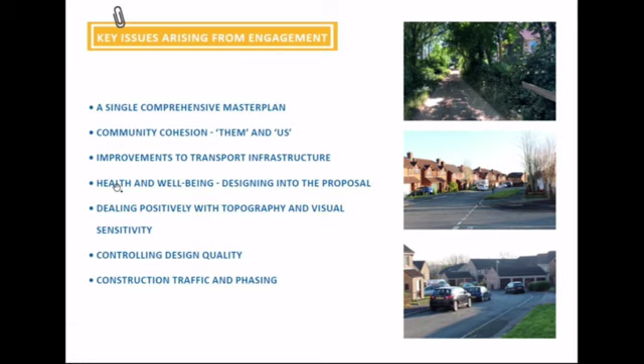And finally, improvements to transport infrastructure, construction, traffic and phasing. That's certainly critical for local residents, and often the classic answer is there will be a construction management plan. I think we need to be seeing that now so that everyone can be reassured that it's in hand.

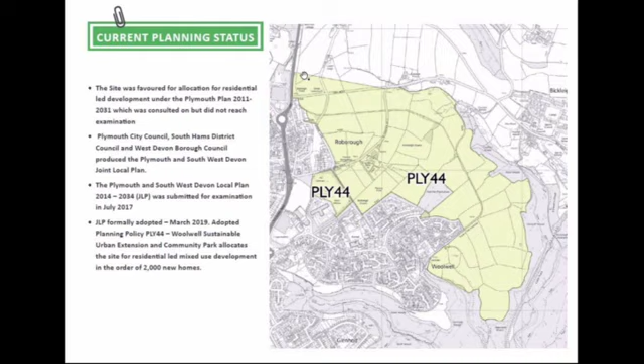So our starting point was always, although it was a draft at the time, policy PLY 44. I'm not going to try and read down this because that would be foolish. What we've done is just try to summarise the key issues that come out of that, and that's not to underestimate it in any way, shape or form.

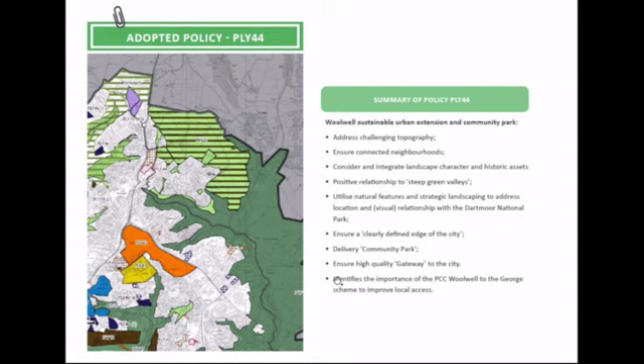Very early on, somebody from the Dartmoor National Park team said we need to consider not just the approach from the park into the development, how you first arrive at Plymouth and Woolwell, but the reverse - how, moving northwards, do you present the park? So anything that happens in the top part of the site, adjacent to Tavistock Road, needs to create a positive gateway, both to the city, to Woolwell, and to the park to the north. This identifies the importance of the Woolwell to George scheme and how that will make this function.

Back in 2015-16, normally on a master planning project of this scale, I'd be keen to get my pens out and start sketching ideas, and then all the other consultants join me around the table and we work through these things, making sure components like ecology, archaeology, transport, drainage and landscape are balanced. This was different. This was very different.

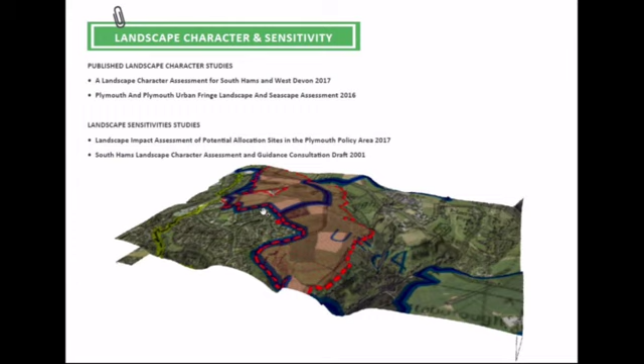Our landscape architect consultant, Ben Rosedale from EDP, did a block of work really getting to know the landscape character, the topography, everything about the site. He presented that to us formally, in fact to some members and officers back in late 2015, as our first understanding, to try and make sure we got it right. He looked at existing landscape character studies and sensitivity studies to really understand the lie of the land.

Respond to the open views to and from Dartmoor, and the requirement for woodland structure planting. I don't think it's a case of just designing enormous new woodland buffers to hide everything - we need to be smarter and more intellectual than that. One of the things we want to do is preserve as much of the existing vegetation, trees, hedgerows and woodland blocks on site as we physically can, and I think we can achieve that - an enhancement of the existing.

Respect the physical constraints of steep-sided valleys, partly to do with movement and accessibility. And understand the bigger picture about what we see from the church at Bickleigh, the barracks, how lighting in the barracks might affect the site, and how any new proposals might affect those long views from places like Shaugh Prior.

Then importantly, the tramway. It was always discussed that the tramway, particularly in this north-eastern section where the views are most visible and open from the national park, provides an existing physical barrier to work to. At the moment you can walk along this section quite comfortably; this section you struggle to find it - it's buried in bits of hedgerow and becomes single-sided. But this section you can still see the Devonshire banks and the vegetation on either side, and it's a major asset for the project. We're treating that as one of our main foot, pedestrian and cycle routes through the development.

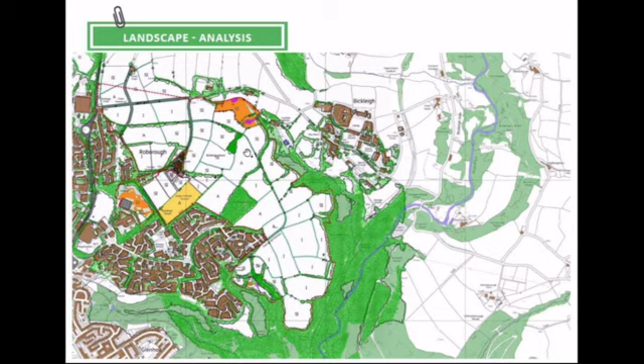There is then a sort of apron which goes around the site to Pickpie Plantation. Although the top section of the site around New Road is relatively flat, sections around the central parts of the tramway and down into the southernmost sections of the site, you really do suddenly find the steepness of those slopes.

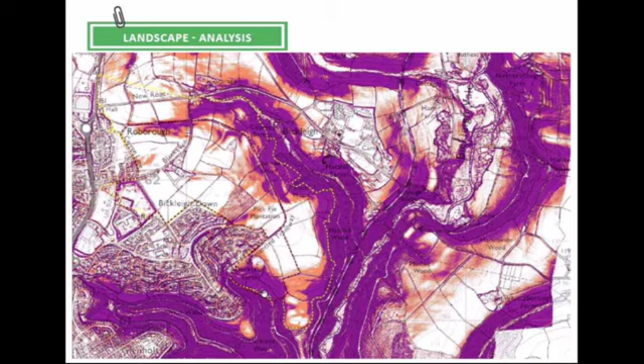And part of that landscape character work was... sorry, I ought to orientate this again. So, Tavistock Road, I think we've just got the A38 on the very bottom left-hand corner of the slide there. The red is the policy area, so you can see it's at a different scale. Apologies for jumping up and down the scales.

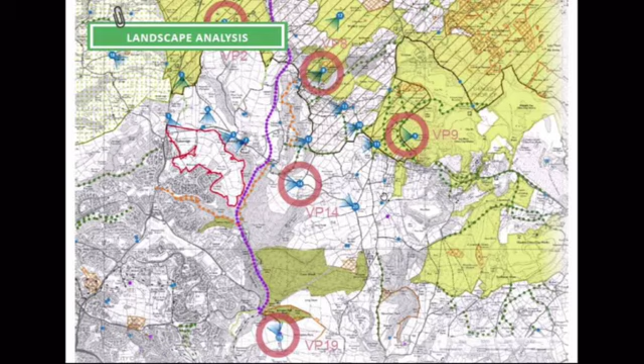And these are viewpoints that were taken. They're one of many, I just happened to select this grouping out of a very long presentation. But you're into the Dartmoor National Park, and the next two slides will show you the view from slides 8 and 9. We wanted to really understand from these long views, Hawks Tor, and I think the next one is Dewerstone, if I'm correct, what we were actually looking at across the landscape.

I'm going to try and guide you in. This is the tramway coming around the site, as we've seen. We're back to the previous scale here. If you look at these, there are 1, 2, 3, 4, 5 diamond graphics shown on this drawing. From the national park, from beyond Bickleigh as it were, this is the most sensitive part of the site, and this is where we need to reinforce the existing hedgerow structure.

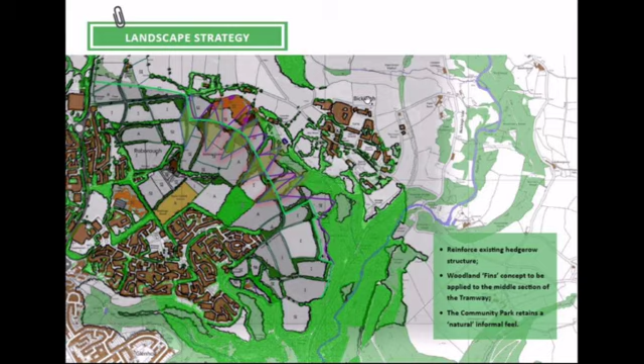And very early on, officers from the national park were saying, if you do that, please don't turn it into a very formal park. It needs to be naturalistic. It needs to be almost agricultural in its quality. Maybe even animals are used as part of the maintenance and management regime of that park in the future. An interesting concept, but I could see the logic straight away.

This really is just the next sequence in the diagrams, where these pieces of woodland and new structure are starting to be positioned, linking together with Pickpie Plantation, forming screens in some places, forming little viewpoints in others, but it's all based around the tramway.

Now, woodland planting in three forms is in the green box on the bottom right-hand side. I better explain myself. Some of those blocks of woodland will be solid, some of them buffer - that's number one. Number two, filter - strategic groupings or blocks. An accent - maybe individual trees, very carefully positioned. So yes, we are playing nature. Yes, the landscape architects are going to have a very interesting job to do here.

But there is a way that any development that takes place in this part of the site can be assimilated, mitigated to some extent, through the skill of the landscape architects on this project.

Tramway as a strategic foot cycleway link - that's a no-brainer from the beginning. And then importantly, all of this site needs to be drained, and the water needs to be held on site before released to the wider picture.

And very simply - and I perhaps apologize to anybody who is a drainage engineer in the room at this point - the northern extents of the site will drain to attenuation basins situated and constructed adjacent to New Road. They will then feed into the watercourse and effectively work their way down the river valley into the system.

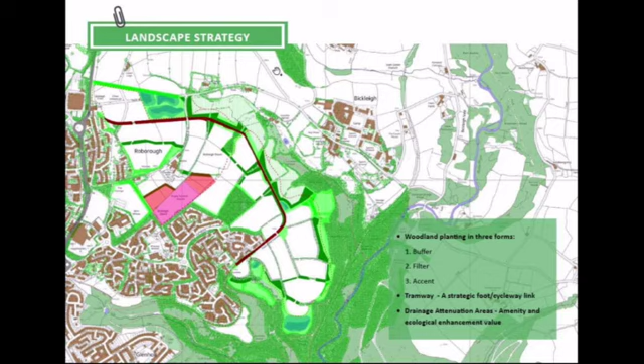Site constraints. I've talked a lot about landscape, I've talked a bit about some of the other items, but this drawing captures all of the things that need to be taken into account when looking at the site.

So we've got the contours on, so we can see the way the levels and falls work. We've got public rights of way, we've got our strategic requirements. So the offset - this purple line here that I'm just tracing with the mouse - this offset 40 metres to the existing woodland, that becomes a constraint to us.

One apology perhaps to you, that the hedgerows - a lot of them are shown in blue. That's simply because they're categorized A, B, C, D, with A being the highest quality, D being the lowest. And our constraints plan tells us that information. So if we do have to put a break in a hedgerow, we know where to go to try and put that break in, the lowest quality.

And finally, just on here, without trying to explain the whole diagram, there are historic buildings, listed buildings - the church in Bickleigh is the obvious one. But in the northern part of the site, we've got some quite considerable utilities constraints, so gas mains, water pipelines, and I mentioned the overhead. And they have their own requirements, their own standoff requirements.

So, first part of our process: knowing the site, getting our landscape strategy together, and really understanding the site, including the stuff that's below ground, including archaeological work.

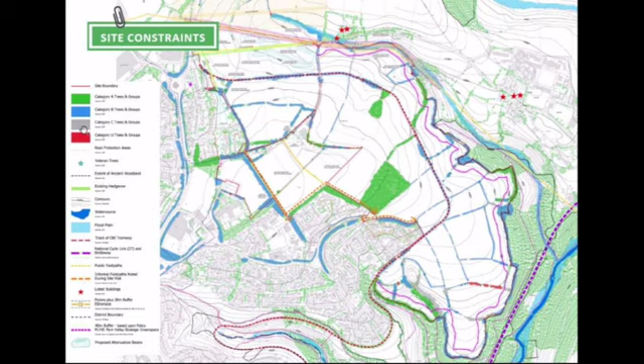Again, different scale of plan. Here we're almost back to the previous plan, where this is the policy area. Here's Woolwell, and then we've got the Tavistock Road coming right the way down through the slide. What this scheme is showing us is where the community assets are - so where retail is, where education is, where healthcare is, where employment is, the blue parts.

And whilst we won't be influencing any of that, understanding all of this is very important, because this is a mixed-use scheme. What I don't want to be doing, or what the team doesn't want to be doing, which I don't think you would want us to do, is to put something very new and shiny within the scheme, which is at the detriment of existing facilities. And we need to be very careful about how we handle that.

It'll, of course, come out in the Section 106 negotiations, I understand that. But even at the early stages, we can do our best to understand how all this fits together.

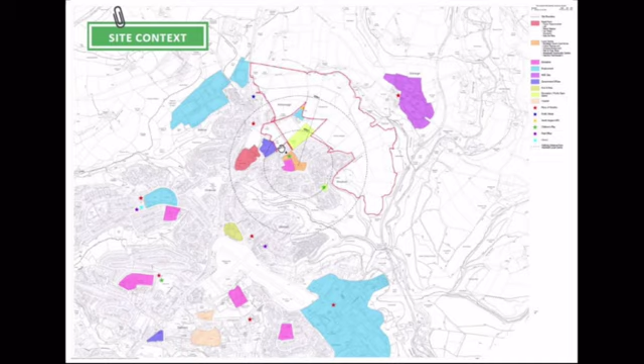Slight change in tack here. One of the things we also have to do in preparation terms is understand the local built character. And this really is, slang again, a game of two halves really. You have the existing Woolwell, Southway - you have other pieces which I won't try and define, but you have the housing that was built between the wars to the present day. But in Roborough, the historic core of Roborough, in Bickleigh, in Shaugh Prior, you have much older, much more historic pieces of settlement, buildings.

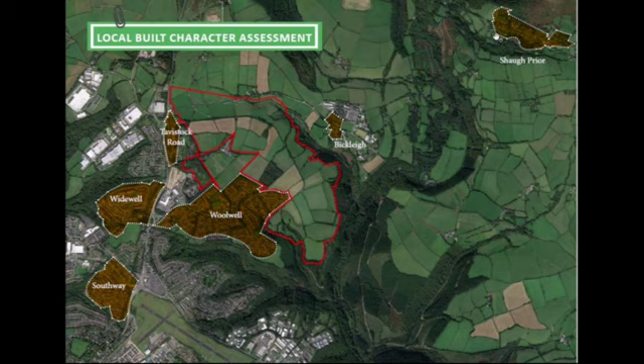And for us, it's understanding what we're connecting to, and really understanding that well. But it's also understanding about what the original DNA of the place is about - and without boring you to death, analysis of the layouts, analysis of the building forms, storey heights, roof pitches.

Do they have chimneys? Don't they? Are gables, dormer windows used? What do they do on the gable ends?

All of that's really important to understand, so that when we create new instructions—and this comes to the point I mentioned earlier about how you control design quality—what is that basic DNA? What is the starting point for us? Once you move to the bottom right hand of this drawing, things change slightly.

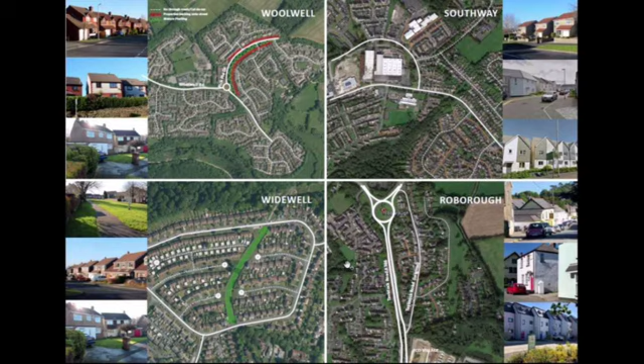You start to understand how stone is used. You start to understand that just seeing a white building, it might be white painted stone, it might be white painted brick, it might be in a more traditional way, a more contemporary way, render. Understanding proportions, understanding the characteristics of this is really, really important.

We would need to present this in the outline application. We've obviously shared it with officers and members. But we need to explain how any new proposal relates to this original DNA. That's part of the challenge that we've given ourselves.

So that's all about preparation, getting ourselves in the right place to actually start thinking about how do you deliver. What is the plan? I'm going to run through a series of six, in some ways very simple diagrams, but in some ways they really do tell the complete story.

It has to start with an understanding of the site on the left-hand side, number one, the site. You have to understand the topography, you have to understand the views, and you have to understand what the tramway can do for us in terms of future plan.

If I move to the drawing on the right-hand side, one thing which is, I think, crucial to success is the relationship between the existing Woolwell Centre, school, community, and whatever we produce within this new plan, this new layout.

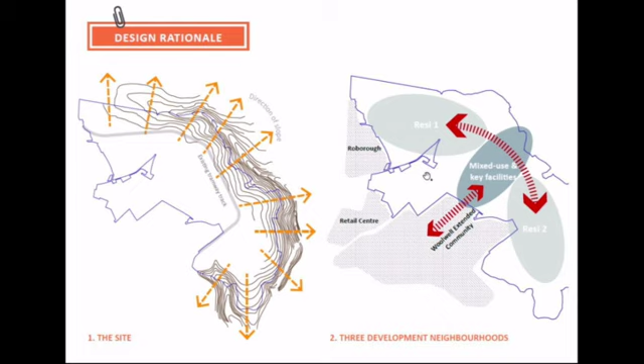We've talked a little bit about the landscape edge and the community park, and that will form a fundamental piece of definition for this scheme. Once it's defined, you don't step over it. That is the edge of the city. Remember, it was one of the objectives in the policy requirements.

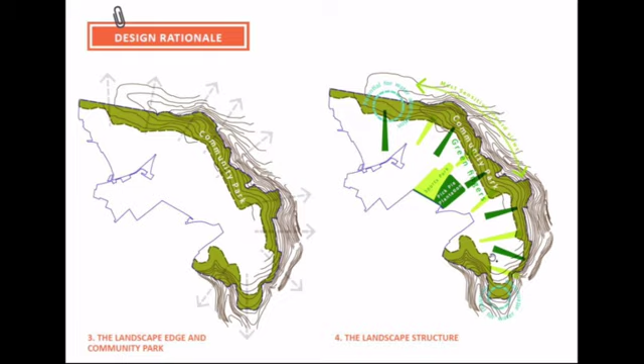If you then start applying to that diagram on the left-hand side the strategy I talked about with the woodland fins, working the tramway, and picking up Pick Pie Plantation and reinforcing the existing sports pitches which occupy the space just next to, or across from, the Woolwell Centre—then you start to see the green strategy, drainage at the lowest parts of the site. This then starts to become our landscape structure.

You've probably been waiting a long time for me to say something about movement and vehicular movement. A scheme of this scale and order needs some kind of definition, some kind of structure. It needs a street—I hesitate to use the word road, I use the word street—to make sure that everyone can orientate themselves. A lot of schemes recently, over the last 15, 20 years, have been based around the principles of very intricate layouts, lots of turns, corners and twists.

You get lost in those places because there isn't a hierarchy of streets and blocks and buildings. What we're proposing here is effectively a new access position on the Tavistock Road, at the north, as you'd perhaps expect. There's a spine road that goes through the site, services it, and joins up with Pick Pie Drive in the south.

Neil's going to give you some more information later about Bickleigh Down Road and the fact that we'd originally shown it as connected through to the scheme, but through consultation and some fairly hard, genuine discussions, we're not proposing that now. We're not proposing a vehicular connection to Bickleigh Down Road, or at least the western end of it.

Towerfield Drive, on the other hand, is a second tier access position for us. We'll give you more information on this as Neil speaks and you get a rest from my voice. But the existing tramway is still an important part of our structure.

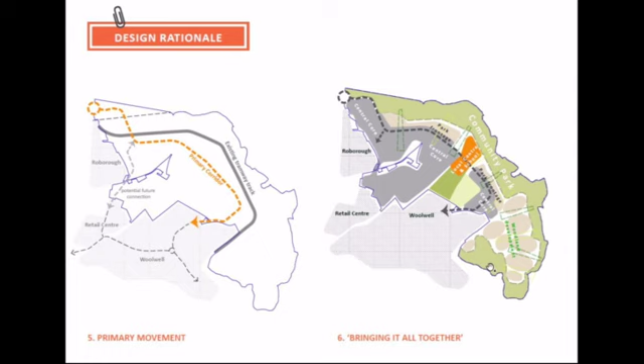So you bring all that together on the final diagram, and you start to think about the darker grey colour, what we've called the central core, which is probably where the density is at its greatest. The edges have park frontage, and once you're contained by the woodland to the south, that woodland development can have a slightly different character, a different set of instructions. I'll come back to this as we go on.

So you bring that all together, and this is the concept master plan. You can see the tramway is the big green line, here's the spine I've just talked about, the limitations of development, and the community park sitting here. Then there's this important link between the existing local centre and how we make this tie together, and how any new facilities here are easily accessible for the existing community.

This stuff here isn't just about the buff colour on here, it's about all of this slide and beyond. I didn't say this, but we need to - and this came out of our discussions, particularly with Bickleigh Parish - making sure that people who live beyond the scheme aren't inconvenienced and still have the correct routings. So joining onto New Road and making connections work here is also an important part of the proposition.

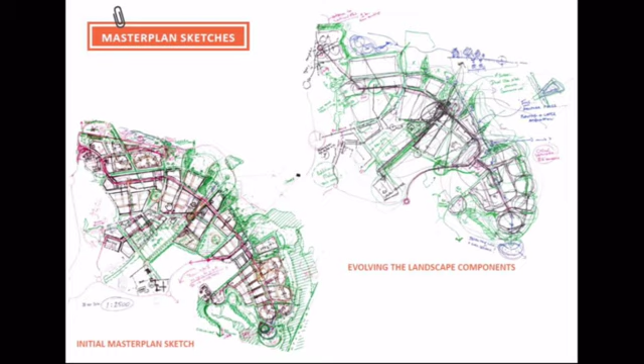Now, you might think they look a bit scribbly, a bit childlike, but these are some of the early sketches where we really started to put some block formation and landscape structure into all that work we'd done previously. And of course we were able to share this with the planning and urban design officers within the council.

And where did we get to? This is the illustrative master plan, which we used in the public consultation events in 2018.

When the outline application is submitted, there will be a set of plans which define the big principles - what's green, what's built, where's the school, where's the centre, what are the densities, the building heights, the maximums, the access positions. This drawing will be included within that submission, but it has no status. It's illustrative - it shows that if you follow all of those rules and instructions that the parameter plans define, you could get something like this.

And as we go through, you'll see that a lot of the work done since then is about testing this - making sure densities, building heights and access positions for people can be accommodated. But this is the current illustrative master plan, with the school positioned here overlooking the community park.

Again, we had a lot of debate about where to put the primary school. Should it be further in, closer to the existing school? One reason we eventually selected this position was because of the long distance views across the valley. Do you remember I talked about these green fins being able to break up the development edge, so you saw roof, green, roof, green? This bite out of the development area is now principally green.

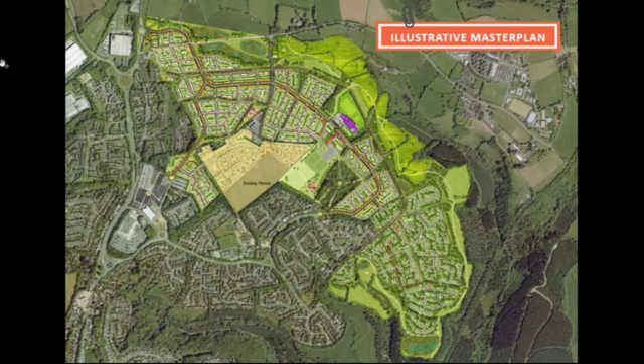And now, you're probably sick of my voice by now, so I'm going to hand over to Neil, who's going to talk specifically about transport issues. Brilliant. Thank you, Dominic. Good afternoon, everybody.

As Dominic said, I'll start with my first slide. I've called this access improvements, but Dominic made a really good point earlier: while the master plan is inherently landscape-led, connectivity, access, and community cohesion are fundamental elements that underpin the master plan and were early considerations in sketching the options you saw in Dominic's presentation. I've got an image to relate the site to the wider context when it comes to transport.

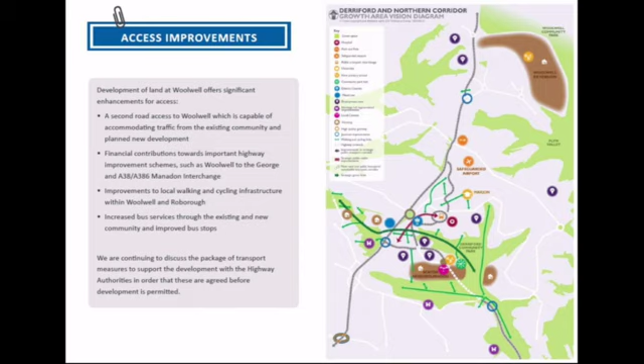This diagram is showing some pedestrian and cycle links, but essentially the point I'm trying to get across is that fundamentally we want to ensure the master plan is designed, connected, and planned in a way that makes it as easy as possible for people to walk and cycle around, working with the contours to keep routes as flat as possible, but also providing more direct routes along steeper ground where it might not be accessible to all, while ensuring across the site that people are able to walk easily between the house, the school, the shops, and the bus services, and even between the existing and new facilities, making sure those connections are in place.

We're looking to improve the bus services, and I'll come on to that in more detail, significantly increasing the frequencies through both the new and existing areas of Woolwell. To support that, we're looking to provide high quality bus stops, real-time information, seating, and cycle parking, with a fairly comprehensive network of improvements to ensure the use of the bus is made as easy as possible for those who want to use it.

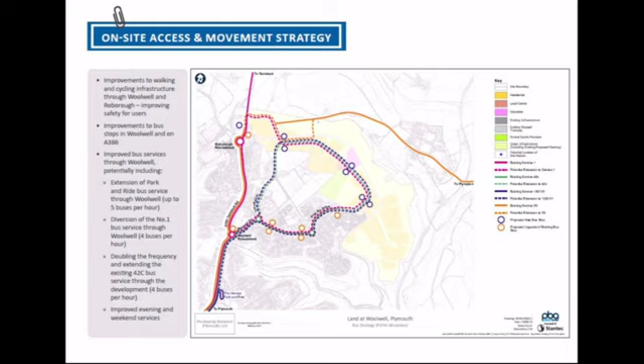The other thing in terms of the bus service - I know there's a fairly limited evening and weekend service, but the added demand for use created by the new development means that through service enhancement, there's also able to be an increase in evening and weekend services, maybe a half-hourly service, which I think should be a really good benefit for the local community.

Touching briefly on off-site, the Woolwell to the George scheme - you obviously know a lot about that. You'll know Plymouth City Council went out to consultation on a variety of options. Last year they came back to tell us that through all the modelling and assessment work, their option B - signalisation of the current Woolwell roundabout and signalisation of the Woolwell Crescent junction onto the A386 - is their preferred solution. They're currently working through the further detail and design, and we've got more meetings planned to understand those in more detail.

There's strong commitment from Barwood to contribute towards the delivery of that scheme. We know the importance of that to resolving not only the existing issues along the corridor, but also to accommodate some of the additional traffic that will be generated by the development.

And similarly, the work we've done has identified the Manadon interchange, the A386 junction with the A38. We've had conversations with Highways England around their joint scheme with Plymouth City Council, exploring in more detail those initiatives identified at the joint local plan making stage to improve Crown Hill and Manadon as one large junction, not only for vehicles but making it safer for people to cycle across, and ensuring adequate bus priority through there, really emphasising the A386, the Tavistock Road corridor for buses.

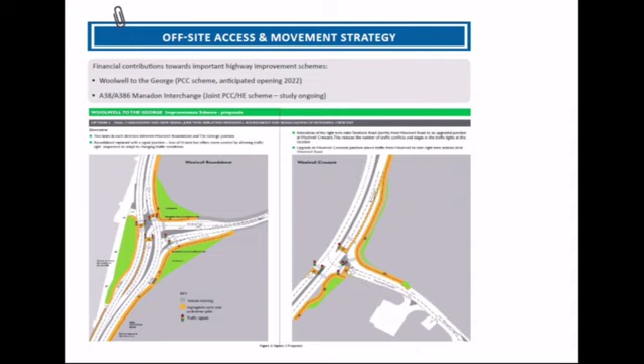There's options for how we might deal with that. Obviously, we're looking to cross Bickleigh Down Road as part of our primary street infrastructure. There's all manner of ways we can deal with that detail. But the objective is to ensure it's maintained for walking and cycling. The amount of people I've seen walking their dogs up and down Bickleigh Down Road when I've been on site, that's the character I want to retain, and it's important we protect that from new development. So we'll be looking at that in more detail with officers as we go forward.

So that's the solution we've come up with. We've also looked at ensuring it not only caters for cars, but that it's safe for people to walk and cycle around. That's been quite a key consideration in the evolution of that junction.

As part of the access strategy, we've looked at New Road and what role it has as part of the wider access for this development. Quite early on in the process, establishing a major new junction in this location meant we had to think carefully about New Road. Did it stay where it was? Do we incorporate it within the master plan somehow? Do we enlarge the junction onto the A386?

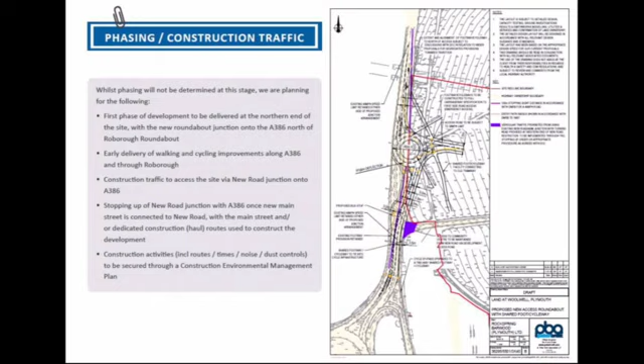That's me on transport.

Thank you. I'm conscious, Mr Chair, of time, and I still feel that we've only just scratched the surface if we were to try and describe all the work we've done today.

Earlier this year, quite correctly for a scheme of this size, we were requested by officers to be involved in the design review panel process. For those who haven't seen it or been aware of it, that process is where an independent series of architects, landscape architects, engineers, and in this case some very high-level transport experts, are invited to come in.

We are asked to present to them what we're doing and how we're doing it, and very often those events take place over half a day, 3 or 4 hours, a morning or an afternoon, and the people we're presenting to haven't seen the site, they've rushed from somewhere else, they don't have the facts, they don't have the knowledge, they will have less than you have already had today. That makes it very difficult to make productive and qualitative. We do it, of course we have to, it's good.

This was different. Again, officers - and with the greatest respect, they're sitting next to me so I'll be careful what I say - but it was very clear we had to do something slightly different. What we agreed with them was that we would do this process over 2 days, which sounds very time intensive, and it was. We would take the first day and take the experts out onto the site.

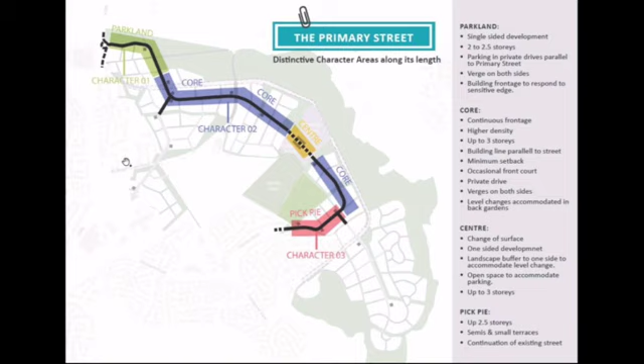So what the panel started to ask us, and the officers were in full support of, and we are as well, is that we define this street to a much greater extent than we would normally do for an outline planning application. They were also very interested in the idea of the green fins and how that idea relates to this whole discussion about the quality of that road, of that street, of that corridor.

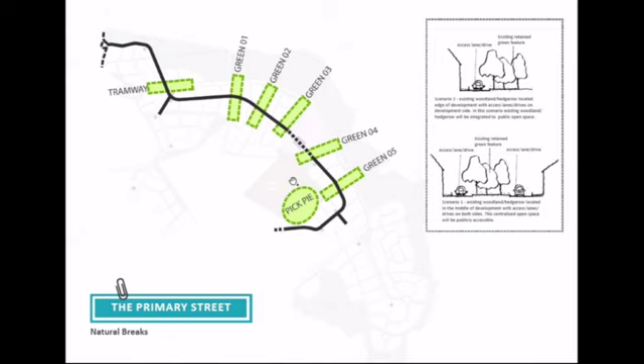And this is a simple diagram showing... What I think is perhaps more important is when you start to look at the illustrative master plan with the road coming through the middle, through the centre, the primary street, and down past Pick Pie Plantation.

These pieces that we're introducing for reasons of visual structure and visual containment can actually play a really important part. Imagine driving along this road and you get to a narrowing, vegetation on either side, and you go through that into the next portion of development. This, I hope, will be one of the techniques that stops this just being a complete homogeneous housing layout. It'll actually have some inherent character to it.

This may not seem like a big deal, an existing hedgerow that's reinforced, that pinches as the road goes through it. But this is what will give this place character, and this is what will allow us to talk about orientation in a very positive way.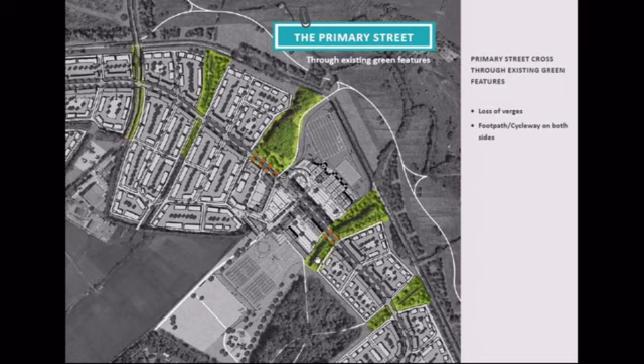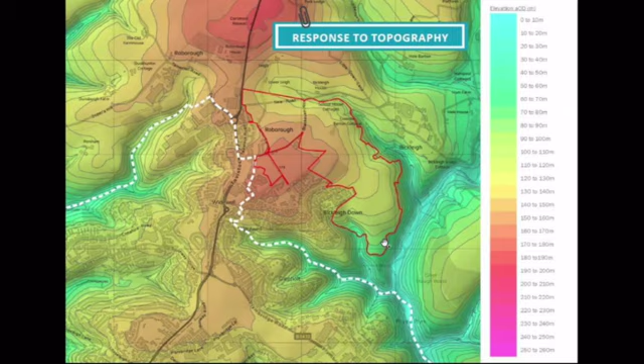The reason for showing you that again is not because I want to show you a better looking drawing. It's because this was the second item that the design review panel asked us to look more closely at, and indeed we'd already been asked by officers and a councillor to look at this in more detail and to prove to them that we could make it work.

And that is the question of how do you build housing, roads, streets, blocks on what is a sloping site, and in some cases a really steeply sloping site.

The only way you can do that is to really start doing layout work, to test it, to start drawing the cross sections through the site, and to actually understand how back gardens facing back to back with housing facing out onto a street, housing facing out onto our main street, how does that actually get accommodated in level terms?

Well, this drawing is quite brutal, if I can use that word, in that it takes the level change out in the houses. So we may have some split level houses. The issue is it's easy to draw the section. It's when you get to the end and the roads start to connect with each other.

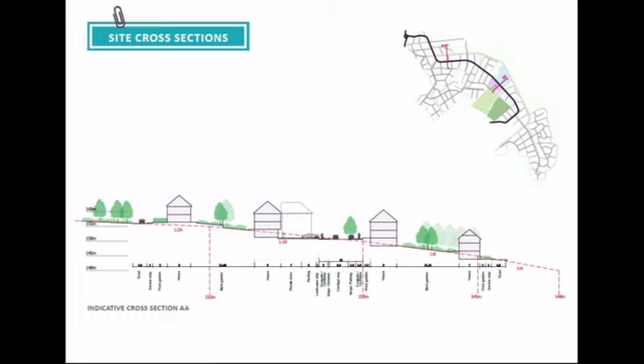If you go to the scheme that's just outside the council offices here, you'll see some of those details in action. You'll see where it's worked, and you'll also see where they didn't get it right. In our outline application, we want to use good and bad photos to actually explain how you should do this, how the next set of design teams working on this project need to approach this task.

I did say earlier, when I was looking at the plan through the school and the local centre, that I'd show you a cross-section. So let me orientate: here is the existing tramway. If you were walking along here now, you'd be in this position with the Devon banks and the vegetation on either side, and the land would be sloping away on your eastern, right-hand side as looking at the section.

And this is where the community park will be, so you'll be able to access the community park anywhere along the tramway. From that position there, where the cursor is, to that position there, is effectively our school site. This is the main street, the spine road going through the scheme we've been looking at. And here might be the local centre, with a new community building and sports facilities stretching back up towards the existing Woolwell Centre and Pickpie Plantation.

You can see that whatever you do on this site, you have to be smart in design terms. You have to work with the levels.

Now, I have been given a little bit of, well, I wouldn't say a telling off, that would be wrong, but what I was suggesting with this sketch is that actually this building could be an exemplar in terms of green architecture, in terms of sustainability.

It doesn't have to be expensive just because it's green, but if you think about those long distance views coming across here, we've taken the opportunity to take a big bite of green out of the development area and position the school there.

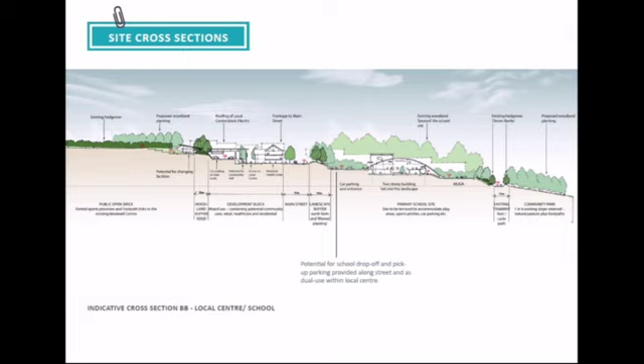Let's go the whole hog. Let's make sure that the building itself is nestling into the landscape and says something about the opportunity of building this close to some great views. If you're sitting in a classroom here, you might have trouble concentrating on your lesson because you're going to be looking at some pretty amazing views out of this school.

The third and final point, we are asked to look at the character of the site in a bit more detail. The character breaks down into three areas, so we've started to define the characteristics: density, building height.

For example, on this northern edge, the lighter buff colour, you'll notice that on Parkland, which is the name of that character area, the height restriction is 2 stories. That's a very straight, simple instruction. If that gets followed through into the design, into the outline application and the site-wide design code, there's not a lot to not understand about that instruction.

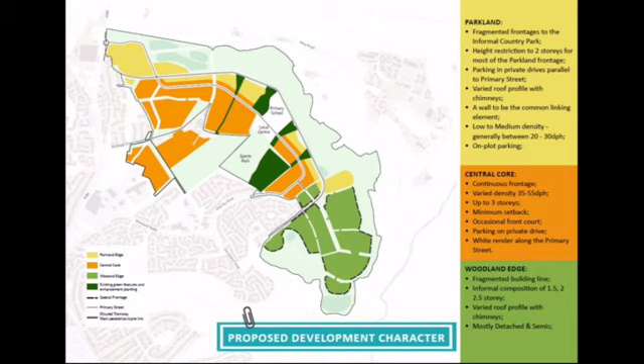The local character study we talked about before will be applied to this in a number of ways. A flat diagram like that is good, the instruction is better, but what it really needs is to understand how for Parkland, for Central Core and for Woodland Edge, the building form starts to actually be instructed.

Now this is very much work in progress, and I'll come on to the code in a minute, but we are getting close to the end, you'll be glad to know.

If you look at the note on the bottom of this drawing, not for inclusion in the outline application, you may say, well, why is he showing it to us then?

Well, we've got different densities, different relationships to green, to edge, to main street, and we have started moving right through the scales to actually start testing some of the parcels that exist on the site, to make sure they work, to prove that the housing mix works, to prove that the car parking ratios, which are difficult, I won't beat around the bush, can be applied, will be applied. Whilst they're not included in the application, they can of course be shared with officers to review what happens at the southern end of the site. How do these units relate to the attenuation ponds beyond?

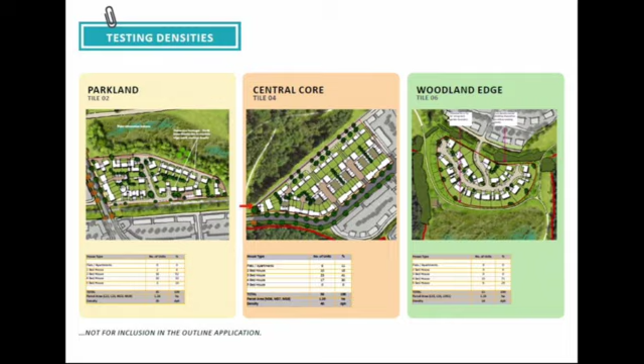So really this was just to say to you, look, whilst these may not be in the application, that work has been done and has been assessed.

This is an extract from the code document as it starts to emerge, where we're actually starting to look at the architectural form. On the very edge of the settlement, this colour here comes out slightly grey on screen, it's actually a buffy colour, but this buff colour, if that is stone, then let's really use stone well.

We're not going to use it over the whole site, that's not commercially viable. So use it where it is important, use it in the best places. If on certain edges of the scheme, facing sensitive views, the edge garden walls can be made of stone, the gable of a building can be made of stone, and that composition considered as one complete piece, not as a series of individual houses and a random layout, then this is where we want to be heading with some of the instruction.

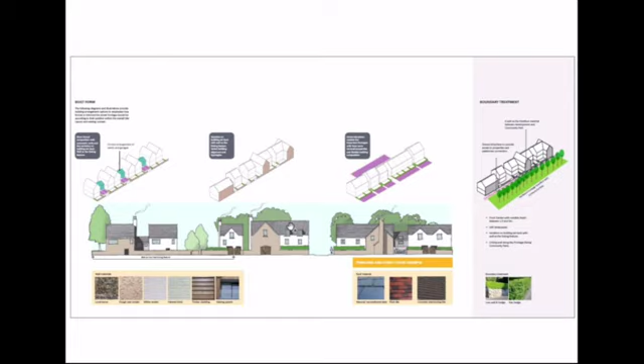Now, bear this in mind because the next slide is the second last slide, you'll be glad to know, but this is a really important question: how do you control design quality?

So we put in with the application the illustrative master plan, and everyone says, oh, that looks fantastic, you've done lots of testing on levels, topography and block types. But the really important question is, when applications do come in the future, what tools do the officers have at their disposal to say, well, that's not what we talked about in the developer forum back in September 2019, that's not what we've talked about in previous design sessions.

That was always going to be a big discussion for us. Late in, I suppose it was 2018, I sat with the urban designers at offices, and we really worked out that if we were trying to put all of the information in at this stage, we were going to come up with a problem, and I won't beat around the bush.

The Sherford example was discussed and used as a kind of example. What we've decided to do between us as the best way forward, and I do buy into this, is that with the outline application we'll have a site-wide design code.

There will be the approval, if it happens, of the outline planning application. And then before the detail layouts come in, there will be area master plans and area design codes. They will give a greater level of instruction. Not necessarily phase by phase. It's probably likely to be phase by phase, but it doesn't have to be.